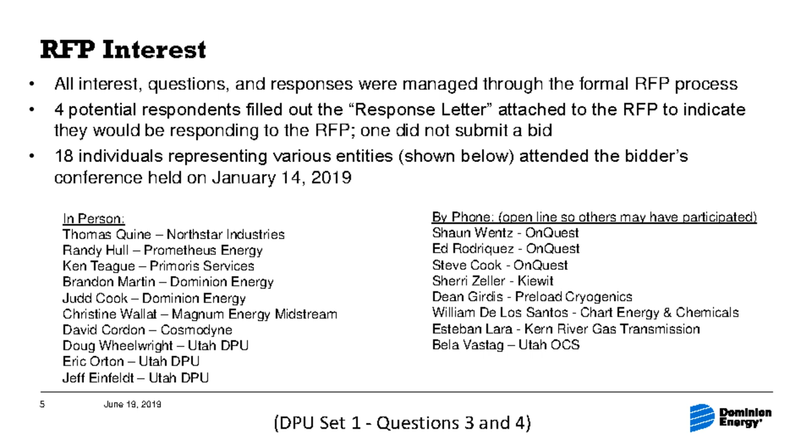The notice that was sent out, we had a question on how we sent that out and how we attempted to cast that broad net. We have in gas supply a list that we maintain of all our counterparties that we deal with on a regular basis, who we send our supply RFP to annually, who we talk to buy gas daily, just all of our industry contacts. We keep a running list that's been developed over the years, so we sent it out to everyone on that list.

That included 81 regional natural gas supplier contacts. Some of them may be 2 people from the same company, but people switch companies around a lot, so we try to keep track of all of them. 7 storage provider contacts, 6 interstate pipeline contacts, and 3 industry business development contacts, people who develop different types of projects in the industry. We try to keep everybody's contacts and sent it to our entire list. That list was developed over a history of interactions from industry meetings, pipeline customer meetings, general networking, and general gas supply dealings. That's how we came up with that list.

We did not specifically follow up with any parties who did not express interest. We didn't go to each one and start asking where's your proposal or anything like that. It was a very open, fair process that we managed like a very formal RFP, and we didn't want to give anybody any preferential treatment. So we tried to filter everything through that RFP process.

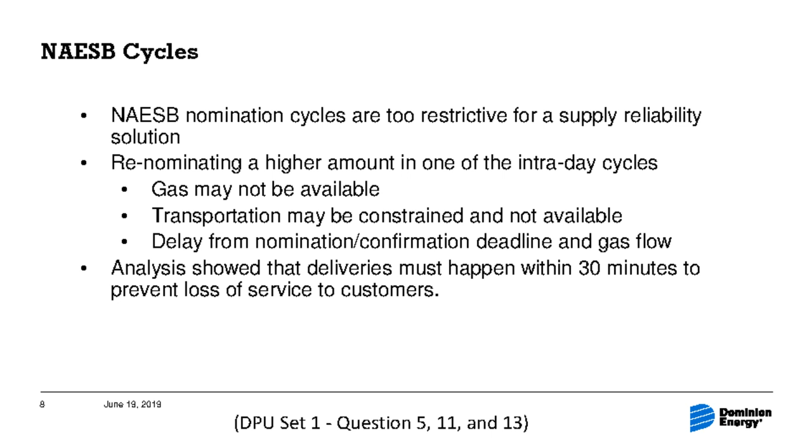There was a question asked about gate station shortfalls and which gate stations we've had particular shortfalls at. It's important to note that supply shortfalls, unless it has something to do specifically with a pipeline break or equipment failure, in general our historical shortfalls have all happened upstream. So it really depends on which gate stations you're transporting that gas to.

We could have gas that is curtailed due to a supply shortfall at a Black's Fork plant, which could impact, say, Hiram, because that's our Hiram gate station. Now we lose that supply at that gate, and we need to be able to make up gas based on a shortfall at that particular point. So it really could affect the volumes and pressures at any gate station, and whatever resource we have has to be able to make up those volumes and pressures, because we don't necessarily know exactly where it's going to happen.

Another part of the question asked if we have historically purchased gas at all of our gate stations. The gate stations where we do buy gas delivered are Hunter Park, Riverton. We have bought some at Payson Gate Station down south, and then Wecco and Central Gate Stations. I combine those because they're near Cedar City and St. George, and when we buy gas at those stations it's a combined point, on the same balancing agreement, so it's really the same point. And then we've bought some gas at Foothill Station, which is in Wyoming.

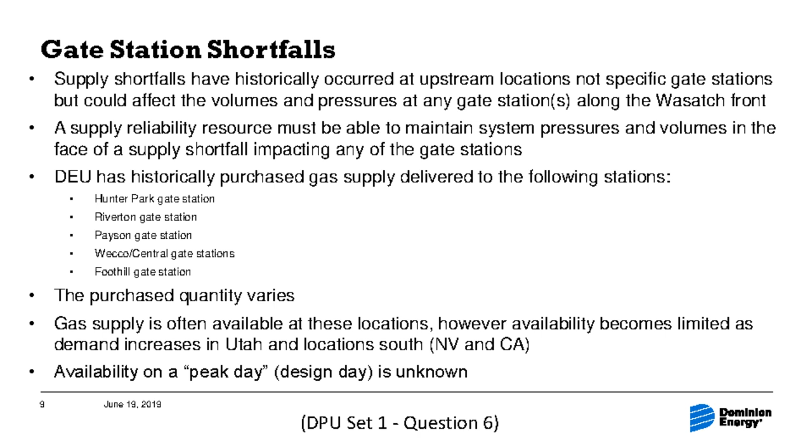There's another question about Clay Basin and no-notice transportation. We evaluated a bunch of potential alternatives involving Clay Basin and different storage facilities using no-notice. Even one of the proposals from the RFP included no-notice service on transportation, so we had looked at some of those. We didn't relook at any of them because nobody submitted a specific proposal for Clay Basin storage. We didn't get anything specific to evaluate again, so we fell back on our old evaluation, and it was not the lowest cost or most reliable option to meet our supply reliability needs.

To be honest, the capacity isn't available right now. It may become available, but right now it's not there, and nobody proposed it as an option. This was sent out to other shippers who have Clay Basin capacity, who, if they were looking to release it, could have put some type of proposal together saying they'd release us this capacity. But we didn't get anything there, so we really didn't have anything concrete to evaluate.

So either in this one or the last one, was part of that analysis talking with the pipeline, or was that internal analysis? It was mainly internal analysis, but we also talked to them about what they could do. They were obviously a part of our evaluation process. We did talk to them, and we didn't hide this RFP from them in any way. They were one of the ones who received it. They had a chance to... I was thinking more of the analysis than last time. No, we work with them and talk to them about what would be available, but there really isn't any concrete proposal available for us out there to say, okay, we can go and do that.

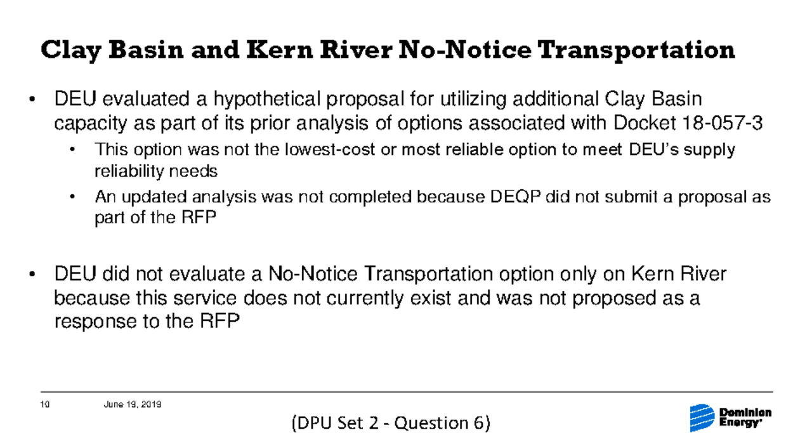There were a lot of questions on an update to this slide that we presented as part of docket 1805703, and I think in the technical conference for that, this same graph was presented. I have updated this graph. We didn't have the asterisk on the one last year, but you'll see it's there now. I looked back, and for that graph, just to clean up some of the noise, we limited it to just cuts that were over 20,000 decatherms, to eliminate a lot of noise, because every day there are small cuts, 3,000-4,000 decatherms, just mismatches and stuff like that. That's an everyday occurrence. We've eliminated those.

To address the question specifically, is this DEU supply only? It's actually DEU supply - it's only our cuts coming from Questar Pipeline. We didn't have the data when we presented this for Kern River, going back historically, so it was supposed to be an illustrative chart showing where some of our cuts were. So it is Questar Pipeline, only our supply. Third-party transportation customers are not represented by any of these cuts - we're only talking about our supply here.

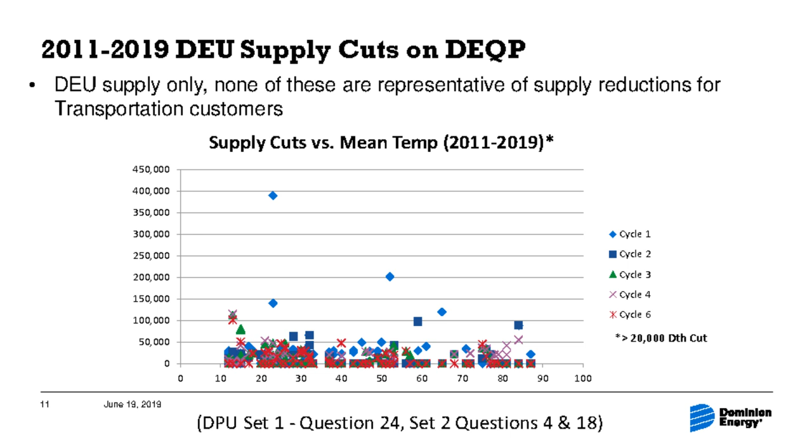So it would just use some of the facility for a few hours on the day. If that same day we needed to use that vaporization or withdrawal from the facility to offset supply shortfalls, we would use the facility all day long rather than just those few hours where our volume was exceeding it. So we'd wind up being able to take a full 150 over the day instead of just taking it for those few hours, if that makes any sense.

Eric, I want to ask about the few hours. So you're saying the pipeline will say your contract limit is 1,000, you can only take 1,000. Yes, but you could take 5% above that throughout the month and balance by the end of the month. Right, okay, so you're getting into monthly imbalances versus exceeding the contract volume.

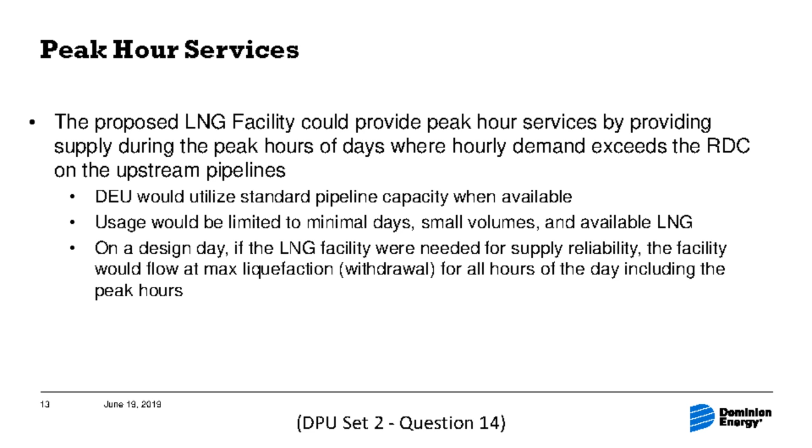There was a question about the supply reliability risk report, when it was prepared. So it was initially prepared in February of 2018, and then again updated in April of 2019. The whole purpose of that was to summarize all of the risks that we consider when we're making decisions, whether they're transportation contract decisions or facility decisions. These were all the risks that we really consider in all of our decision-making process. We just took those considerations and put them onto paper and updated them again in April. So that's really what that report did.

It was information put together from Mike Platt, myself, Mr. Gill, and Tina over there. And the distribution of it was really through docket 1805703, and then again through 1905713. But it's really just an internal summary of things that we consider all the time.

For the benefit of regulators. So you made it for those dockets. And customers. Well, yeah, but it was created for the benefit of regulators. Right, so you made it for those dockets, right? Yes, that we made the report for those dockets. Right, but it's really just a summary of decisions you make on your own.

And I think from there I'll pass it to Mr. Platt. I think I had 13 slides. 45 minutes. That's pretty good. Better than one slide in normally 45 minutes. That's impressive.

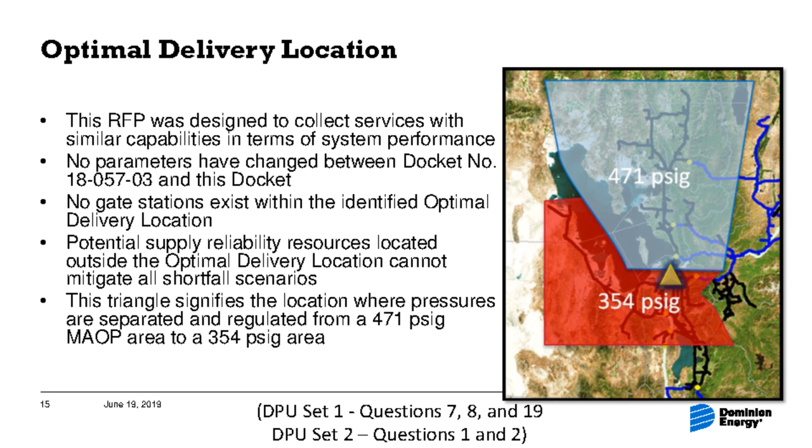Imagine for a second that our system is actually a water pipeline, and we've got 354 pounds over here, 471 pounds over here. We might have some demands out here at the end, and this optimal delivery location is like the separation between these two different pressure pipes, okay? Gross oversimplification, I hope it helps.

So if we had a supply reliability resource come in at Bluffdale, and the pressure drop through the pipe occurs before we hit that, we have gate stations in the 471 area that are bringing in gas, increasing the pressure and bringing volume so that we can deliver to our customers.

Above 125, which is our minimum operational pressure, gas doesn't flow when the pressures on the 354 side are lower than the pressures on the 471 side. The only way you get flow, think back to physics class, like a cup with a card in the middle—you fill up water on one side, and when you pull the card up, it equalizes.

Bluffdale isn't the optimal location due to the fact that gas will not flow north at sufficient pressure. So unless you can have pressures higher than the pressures on the 471 side, you're not going to flow.

Could you add a compressor? Now in this scenario, what would you do here? You could compress from this side north.

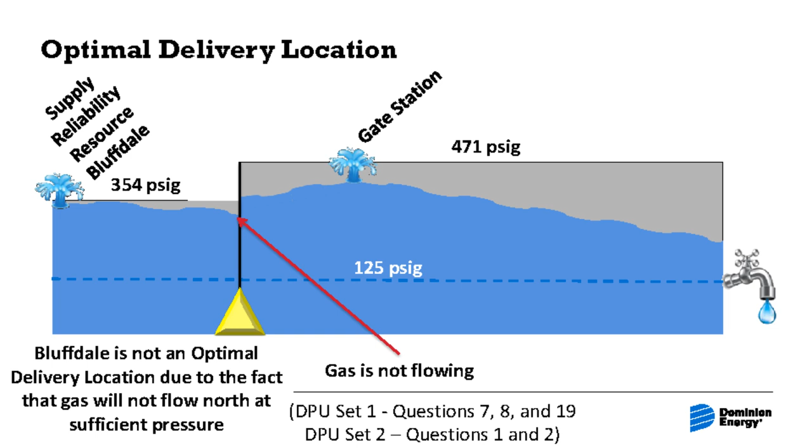That's actually my next slide here. It's possible to reduce the gate station pressure such that your pressure at this optimal delivery location equalizes and gas flows, but then the problem is that at the end of the system—and I've done system models—you lose thousands of customers. That's a problem for me. So the right side is to simulate those that are on the far extreme of the north distribution side, Brigham City.

So because you dropped the gate station capacity here, you're dropping below 125 at the end of the line? Right, not capacity, but pressure. So you could have the same volume coming through, but you let the system drop in pressure so you can pass volume from south to north. Your pressure at the end of the system will drop, and the result will be losing thousands of customers.

So if I reduce the pressure loss in this part of the system, it has minimal benefit because I'm already close to the top of this. Regardless, you've got hundreds of miles to get to that north end of the system. You can add pipe, but it doesn't really help unless you get to the place where you hit 471 at a pressure higher than 354.

So why do we have a system that has two different pressures? How long do you have? Because I could challenge Will for the longest slide ever if we talk about it.

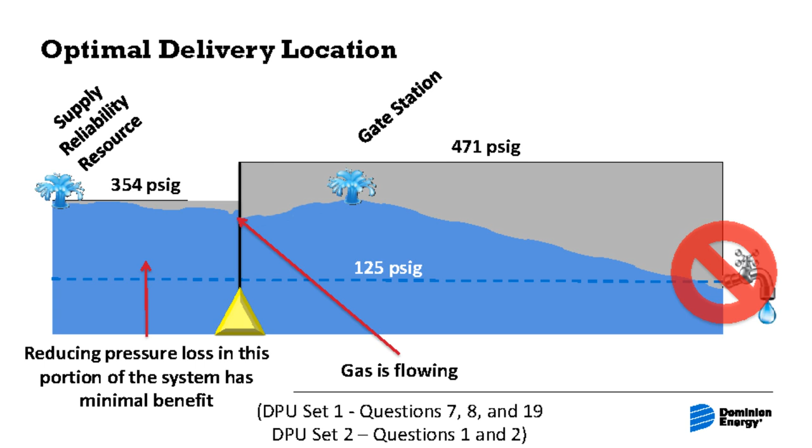Thanks. Okay, so now let's look at an optimal delivery location scenario. If instead we operate the specified area at 720 pounds, which it will all be designed to do, there will be regulation to do that, you have plenty of pressure to push the volume you need in either direction. So that's what makes this location optimal. That's what makes it special.

So you've moved now from delivering from Bluffdale to delivering to these 3 feeder lines, which provide that level of pressure. Anywhere on those 3 feeder lines? Anywhere on those 3 feeder lines. Now you might be asking, and maybe you're not, but 21-10 was identified in the RFP and not included here. It's very short, and I didn't want to talk about it, so now I've talked about it anyway. But it's not on there. So that didn't work.

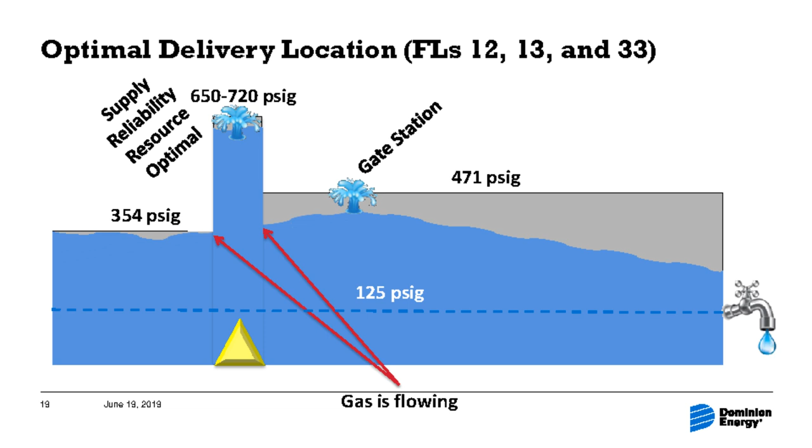I don't like compression, I've said it, I'll say it again, ask me next week. It's not a good option.

So, someone asked about tangible system benefits from reinforcements that were added to some of the options, and we evaluated all the models and proposals to determine the benefits as proposed. Other analysis included determining the minimum system required to provide similar benefits. The minimum systems did not provide additional benefit beyond that, so there were no tangible other benefits.

Okay, so I'm not quite sure I understood the question or your answer. So that must not have been your question. So is the idea that in order to evaluate each proposal, you said, what's the minimum we'd have to do? How do we minimize the costs to get that option to work, to have a similar benefit? So there is a certain amount of benefit then that's incorporated into that, where I'm getting to is, so you've put in some infrastructure to make that proposal work.

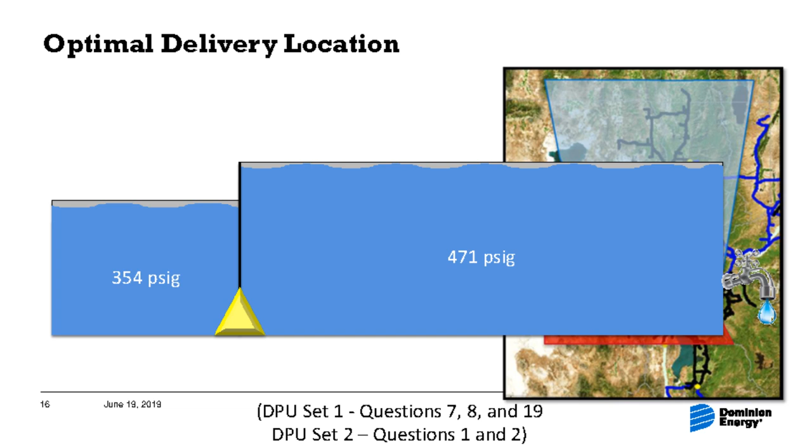So can I follow up, because I didn't understand that answer either. It sounds like what you're saying is the system you're proposing has these benefits, and now we're gonna make all the other proposals match that in all respects. Not in all respects, but in system results, right?

I mean, there are some things LNG will do that other options won't, and some vice versa. But that assumes you're starting with the set of benefits that LNG provides as the optimal set. I think the better way to look at it is not a set of benefits, you're looking at a need.

Our need is to be able to withstand a shortfall of up to 150,000 at any one of our gate stations.

Well, that's what you defined your need as. Well, that's what we, as the operator, define our need as. Right, and that's what we wanted those solutions to be able to meet, that need. And when we evaluated the proposals, we looked: did it meet that need? Yes or no? If it didn't, what would we have to do to our system to allow it to meet that need? That was part of the analysis.

I'm just saying you start with that specified need that includes that specific location. Well, I think it's independent of the location. The need is independent of the location. The need is, isn't what he just went through saying it's important, the location? Not just 150, but at that location because of the pressure issues.

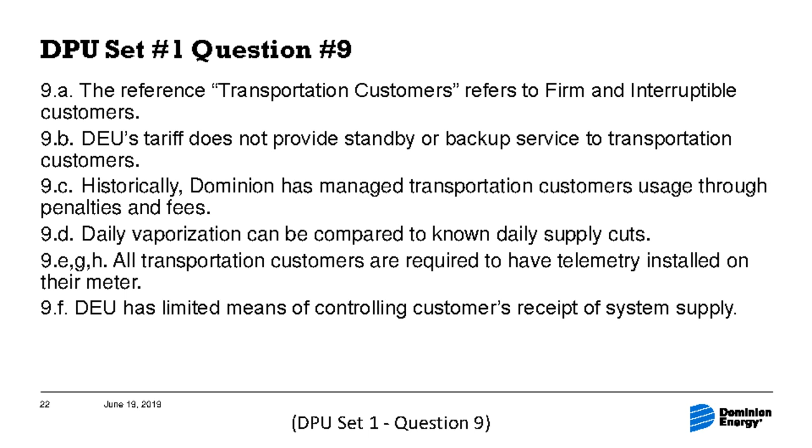So we have 4 different levers that we use to help manage transportation customer imbalances. The first one is we have monthly supply imbalances. So we allow our customers to be plus or minus 5% on their supply, and by the end of the month they need to be trued up. And they can exchange those imbalances with other customers. That's the first thing that we do. That's been in place for many years. Then we have the daily imbalance charge.

So that's a daily charge that we assess to customers for every decatherm outside of a 5% imbalance that they have on any given day. So we actually take a snapshot every single day of how much they use versus how much they nominated, and anything over 5% gets assessed 8 cents. That was instituted in 2014, I believe.

Then we have restrictions on daily imbalance, or operational flow orders, and that's been in place for many years. How that works is in a day when our system is constrained, we can issue one of these, and I'll show you a little more detail on that in a moment. But basically what happens is if the customer falls outside of that restriction, we can charge them either $1 or the greater of the price differential for the day, so they don't game the system.

Kelly, the one clarification on that, it's not necessarily that the system is constrained. Those are more used when supply is constrained. Right. So it has more to do with supply upstream being constrained. You're right, thank you for that clarification.

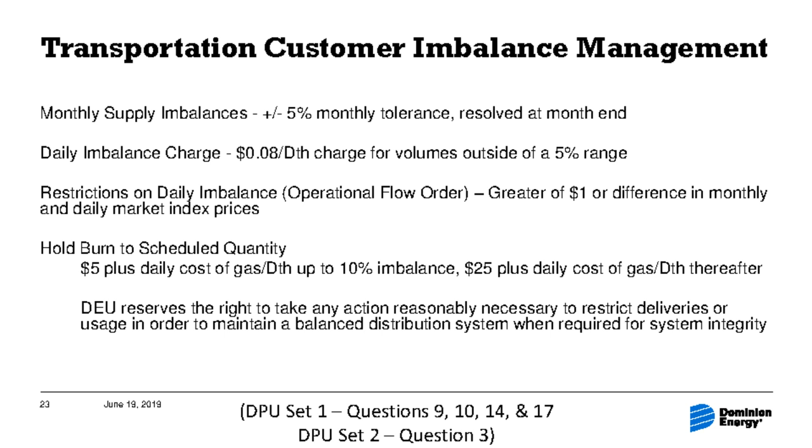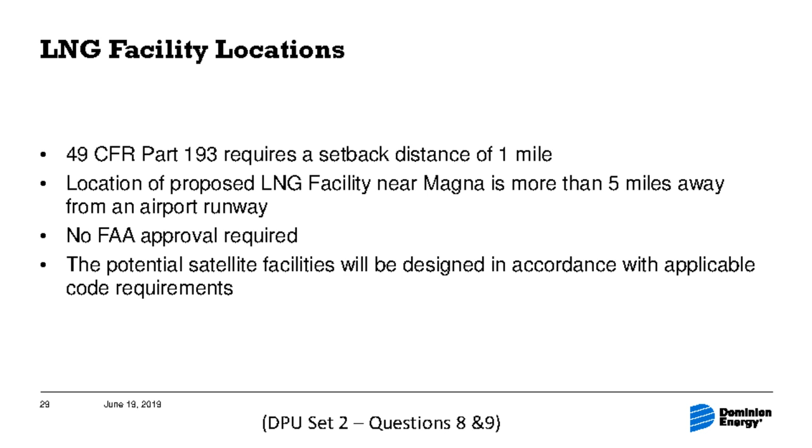As far as the plant staffing—and these are the kind of numbers we put into our OpEx estimates for the facility—what we contemplated is that you would have a day shift: a facility manager, mechanical engineer, electrical engineer, somebody responsible for the mechanical maintenance of the facility, and then one for the electrical and instrumentation maintenance.

And then in addition to that, you would have 3 shifts. So you'd have a day shift with 2 additional operators, and then 2 night shifts that would have 2 operators per shift. We added to those 2 operators per shift kind of a floater, if you will, because you're going to have to account for time off, vacations, sick leave, and all those types of things. So the total count is that there'd be 4 people per operator position—that would account for the 3 shifts plus 1 to cover for the vacations.

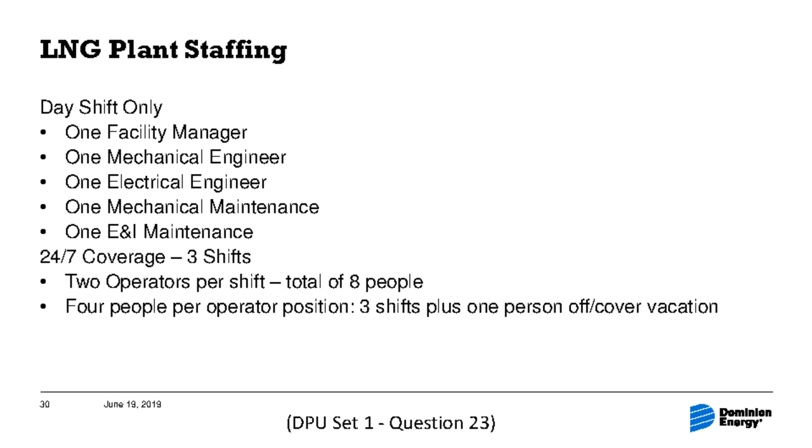Some of this has been talked about before in terms of what we would do without disruptions. I believe this question specifically asked: if we were serving satellite communities but did not have a disruption, what would we do with the LNG? Basically, we would keep the plant full and in reserve until probably mid-February, and then we could use it as needed for price optimization, or until it's down to that 70% mark. What does price optimization mean?

Tina could probably speak to that better than I could, but how I view it is that the gas you have stored is a cheaper commodity than you could buy on the open market, for example. Do you think that's the case? I don't know, Tina, do you want to talk to that?

I tried to do a catch-all phrase, which probably wasn't ideal, but the idea was sometimes we're looking at: do we buy gas, put it in storage, potentially Clay Basin? Is it cheaper, if we needed to get 30% of this out—we'd look every day, that's kind of what we know Will's group does, is optimize supply. So it might be aquifer, putting it into the aquifers, it might be putting it into Clay Basin, it might be replacing $10 gas on February 26th because it's a Tuesday after a holiday—those kinds of things, because sometimes it's more expensive. So it'd just go into our supply stack instead of calling on peaking gas if it was less expensive.

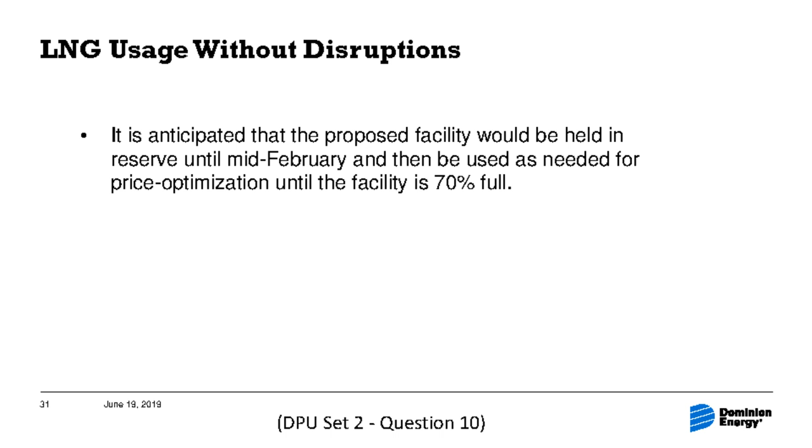So boil off gas. Boil off basically occurs as you're storing LNG. You're storing it cryogenically. You're doing the best job you can with insulated tanks and whatnot. But regardless, there's a portion of it that reverts back to gaseous form, and then you have to do something with that.

So the question was asked, does the vaporization rate of the facility have anything to do with the amount of boil off that basically happens out on your site? And the answer is no, it's largely independent. I say largely because there is a small portion of boil off that could occur as you're readying your plant for vaporization mode.

So as you're taking gas from the tank to your vaporizers, there's a section of pipe that you don't want to just instantly shock with a ton of cryogenically frozen LNG. So basically you bring a portion of that LNG into the pipe and start to cool the pipe down to lower temperatures to a point where it can safely handle the remainder of the LNG coming in there.

But once that's done, the vaporization rate is completely independent of the boil off. As far as how we would handle the boil off, if our plant is in vaporization mode...

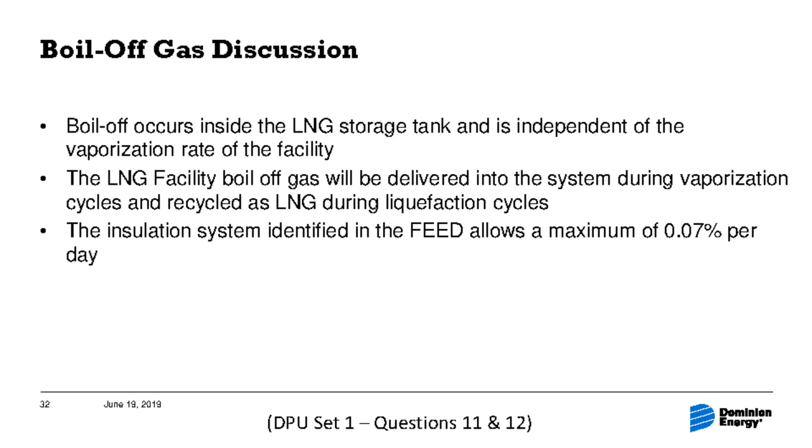Regardless, in any instance, the amount of boil off gas that you can count on is a really small number. 0.07% per day. So it's not a large volume of gas, it's just something that you have to take into account.

So I don't know what the question is here - what is a delivery? Is that the truck arriving? Yes. Or is that the amount that you're delivering to the community? That's a semi-truck delivering to that site and offloading the LNG into the storage at that site. So Kanab, that's basically one delivery a day.

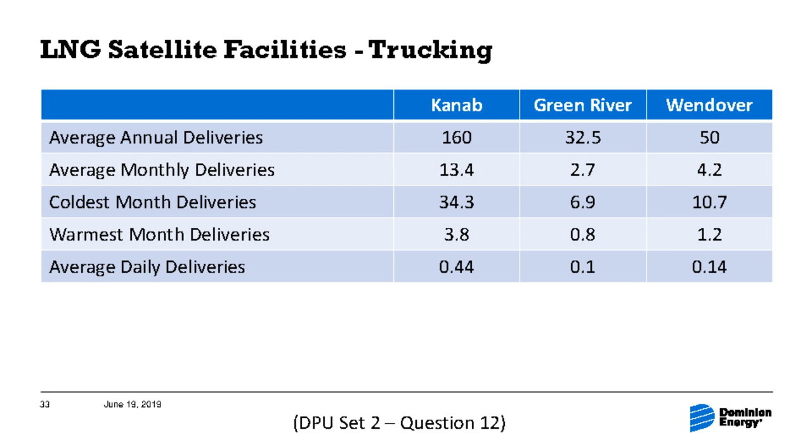Is that West Wendover on the Utah side, or both halves of Wendover? It was just West Wendover, Utah side. We didn't include any of the Nevada side in that count.

So in terms of the cost estimates for the facilities, I think there was a question asking why there's a plus or minus 50% and a 20% contingency. Keep in mind this is a very preliminary look at these sites. The plus or minus 50% estimate speaks to the level of detail put into the estimate. A detailed estimate would itemize a foundation, girders, frames, finish work, all at itemized costs, and build up from there. This level of estimate is basically looking at a building and saying it costs about $12,000. So it speaks to the level of work done to estimate that. That said, for each line item we still wanted a contingency for unknowns of materials and quantities we were estimating.

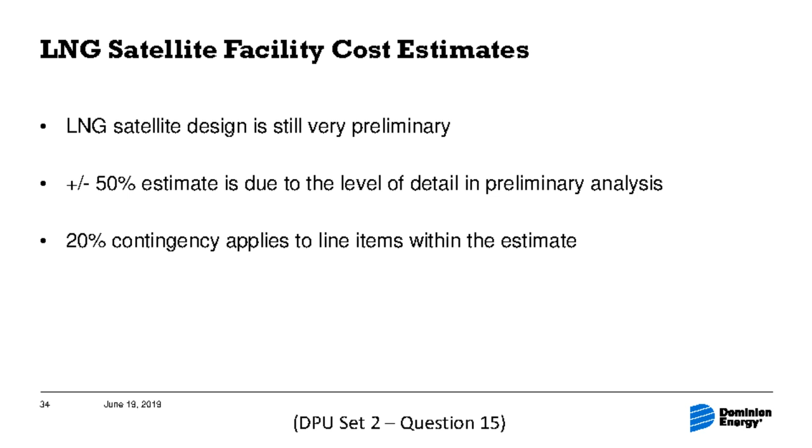Make the next slides go. Yeah, I think you're done. Oh, is that it? Okay, thank you. Any other questions? Okay, I think that's it. Yeah.